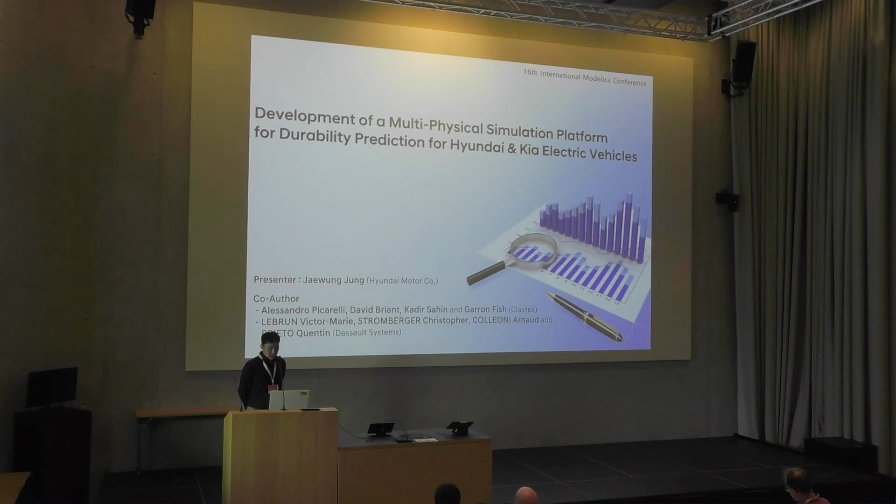Today, I'm going to talk about development of a multi-physical simulation platform for durability prediction for Hyundai and Kia electric vehicles. This presentation is a one-year research project with enthusiastic support from Claytex and Dassault Systèmes. Let me begin with the presentation.

So this is the project background. Not only HKMC, but also most international car OEMs conduct RLDA, which is an abbreviation of Road Load Data Acquisition, for durability development. The RLDA is the activity to measure multi-physical signals within instrumented vehicles on predefined proving ground and field conditions.

However, in early development stages, when there are no physical prototypes, we are not able to conduct RLDA to validate the durability of new mobilities and technologies. Therefore, we want to virtually build all necessary subsystems like this, and then integrate them into vehicle level to acquire the same signals as RLDA on proving ground and field conditions.

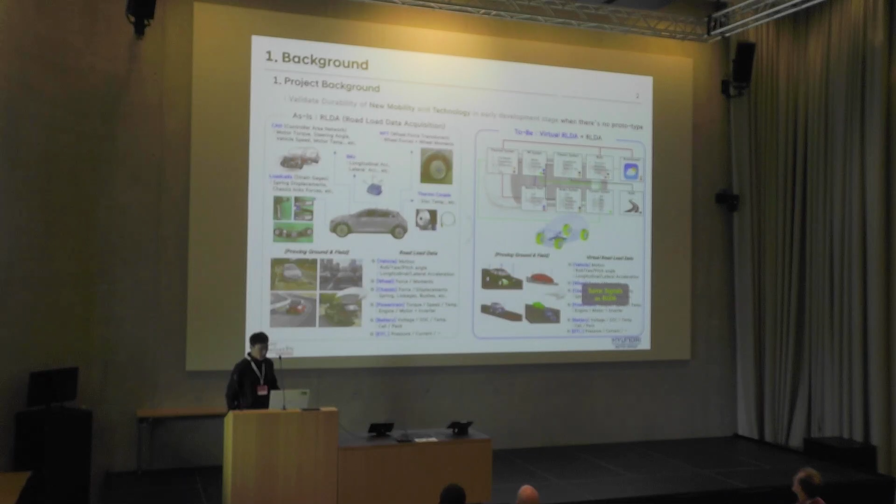As for the xEV point of view, we have defined the possible durability failures not only in conventional mechanical domains, but also in thermal and electrical domains. As you can see on the right side, we also have defined the list of simulation signals that will be used for further durability analysis.

In this project, the in-wheel motor system is selected as a project target as the most challenging new technology. Here are the three major features why the in-wheel motor system is so challenging. First of all, the in-wheel motor system is 40.9 kilograms heavier than the standard wheel and tire system, and structurally it gets the direct road impact.

Also, the in-wheel motor system is affected by both brake heat and motor heat in encapsulated conditions, which can cause motor derating or demagnetization. Also, the in-wheel motor system requires very complex torque vectoring control logics for very different driving conditions.

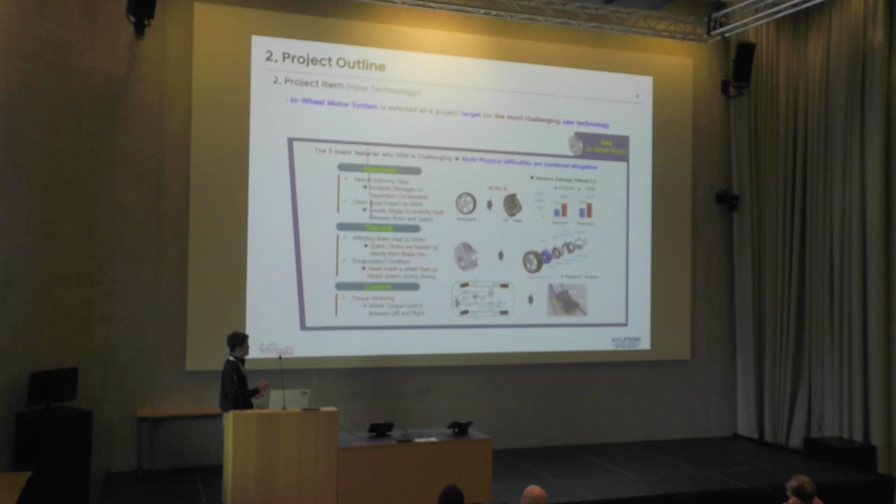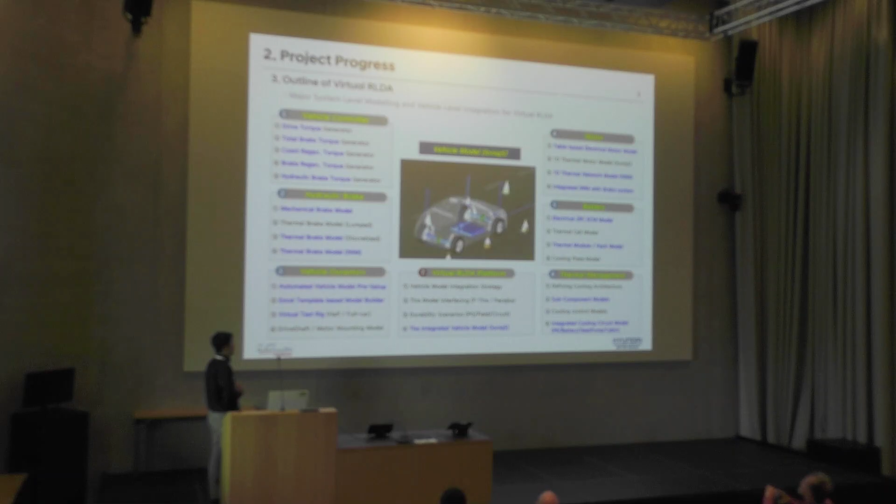So this is the outline of Virtual RLDA. In this project, we have modeled 6 major systems: vehicle controller, hydraulic brake, vehicle dynamics, motor, battery, and thermal management system. Then we integrate them into a vehicle level for Virtual RLDA. From the next pages, I'm going to talk about how each of the 6 systems is modeled and validated with the measurements. The first system is the vehicle controller.

The main role of the vehicle controller is to generate driving torque and regenerative braking torque, and also hydraulic brake pressures during driving. The regenerative braking torque consists of braking regenerative torque and coast regenerative torque, and it distributes the motor torque between front and rear. As you can see on the right side, the vehicle controller is built with Dymola based on the VCU and IAU control logics.

This is the validation result of motor torque and hydraulic brake pressures for 2 different scenarios. As for the front and rear motor torque, the driving torque, which is positive, and regenerative torque, which is negative, are quite well validated with the measurements. It means the vehicle controller is quite rigidly modeled, even for very severe durability scenarios. Our next system is hydraulic brake.

We have modeled both a mechanical and a thermal brake model here. First, the mechanical brake model takes the brake pressures calculated from the vehicle controller that I mentioned earlier as an input. Then it calculates brake torque, as you can see on the right side.

For the thermal brake model, we have modeled both the standard brake model and the 19-inch in-wheel motor rear brake model using a thermal network model, considering conduction, convection, and radiation during driving. On the right side, you can check the validation results of both front and rear brake models, even on very severe downhill conditions measured in a Korean field.

The next system is vehicle dynamics. HMC is using Adams Car as a standard multi-body dynamics model at the moment, and most vehicle parameters are distributed in Excel format. Therefore, we have built an Excel template-based automatic multi-body dynamics model migration environment to be able to use HMC's standard Adams Car model in the Dymola environment.

Also, for efficient simulation, we have built automatic preload setting functions according to different vehicle weight conditions for kinematic and compliance elements. This is the validation result of the Ioniq 5 suspension model with the virtual test rig. As you can see on the right side, the vehicle spring displacement, jounce bumper forces, and lower control arm A bushing longitudinal forces are quite well validated with the measurements.

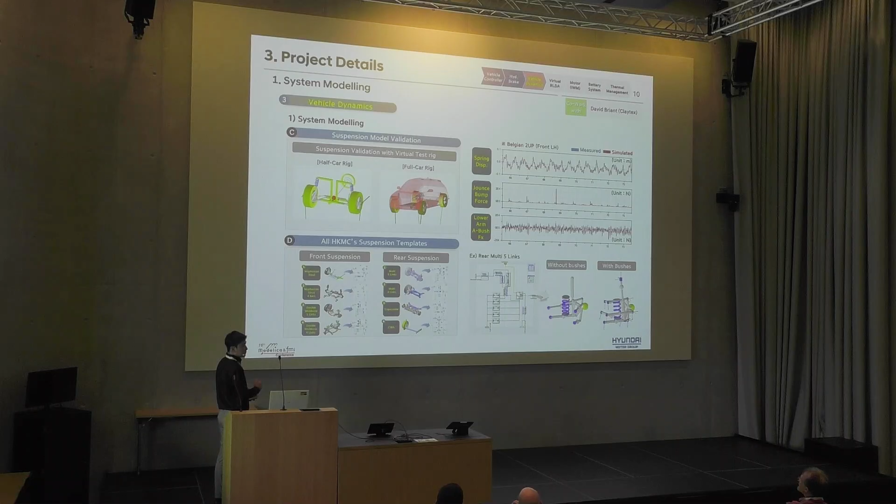By modeling all HKMC suspension template models like this, we are now able to simulate any type of vehicle in HMC in different suspension configurations, whether there are bushings or not. The next system is the motor system.

The left image is the in-wheel motor system in HMC, but due to confidentiality issues, I'm not able to show the exact schematic of it. We have modeled both an electrical and a thermal motor model here. As you can see on the bottom right side, the electrical motor model is basically a table-based model, and it calculates the heat losses on major heat sources in the motor.

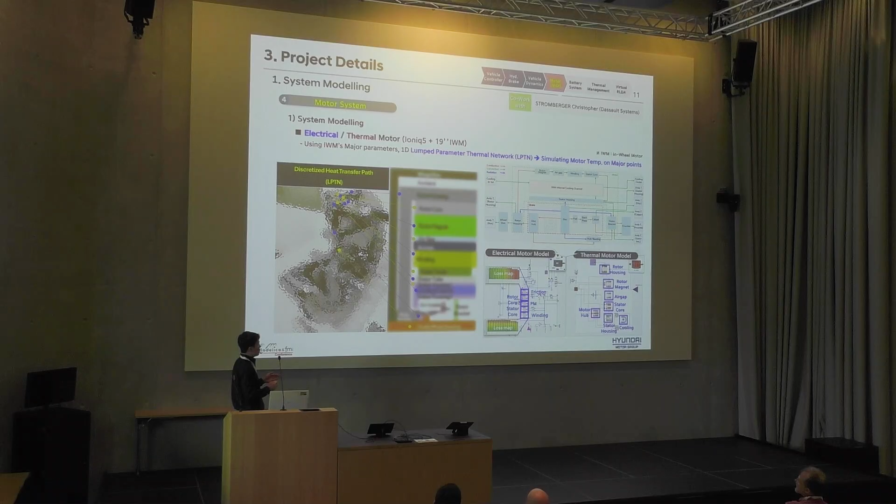The thermal motor model simulates temperatures on major heat sources in the motor using a 1D lumped parameter thermal network model. The biggest advantage of this 1D lumped parameter thermal network is to represent multi-axial heat transfers within a 1D environment.

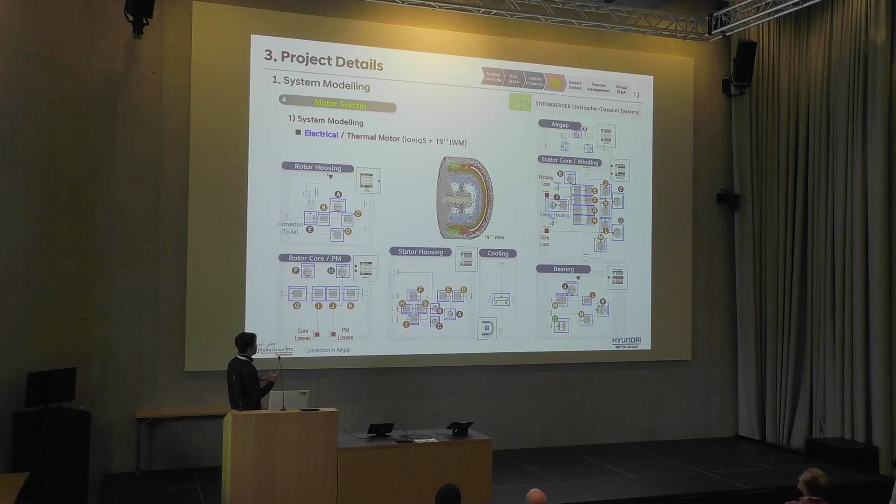So the in-wheel motor system consists of several subsystem models like this, and all these subsystem models are separately built and then interconnected within the in-wheel motor model. This is the validation results of in-wheel motor systems, and in both scenarios the brake pedals are not applied, which means only the motor's heat effect is applied, to see the exact in-wheel motor's heat effect. So in both scenarios, we can see we have validated the winding temperatures compared to the measurements.

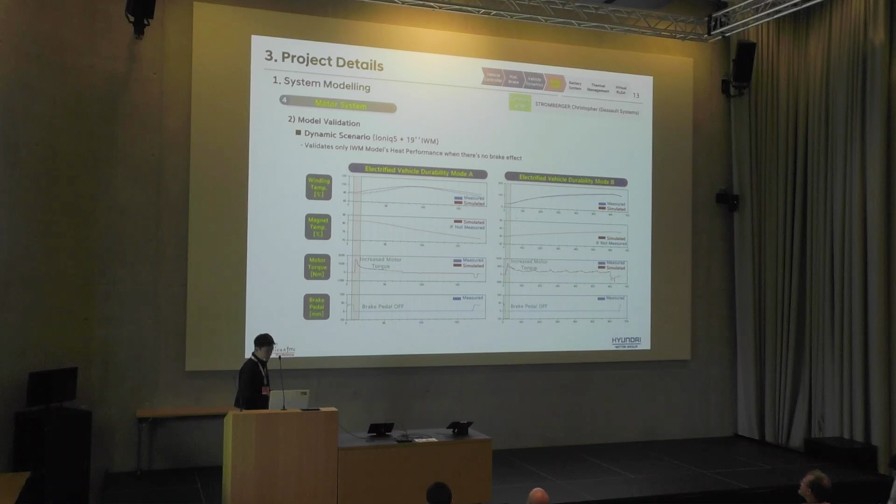So the next system is the battery system, and likewise we have modeled both the electrical and thermal battery model. The electrical battery model is modeled as a 2 RC based equivalent circuit model. For the thermal battery model, each surface of the battery cell is modeled with different thermal conductivities to represent internal heat transfers. Using the battery cell model, we can expand it into a battery pack model, also with the cold plate. On the right side, this is the validation results of the battery pack model on very dynamic vehicle scenarios measured on the Nürburgring circuit.

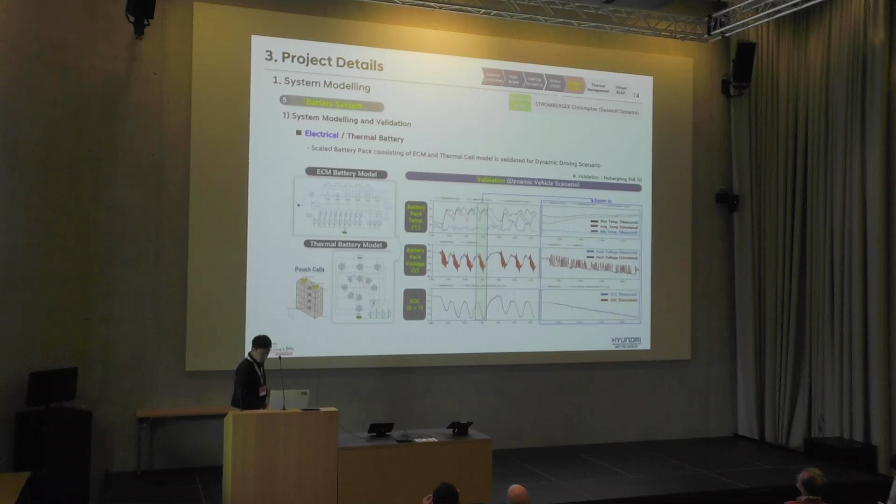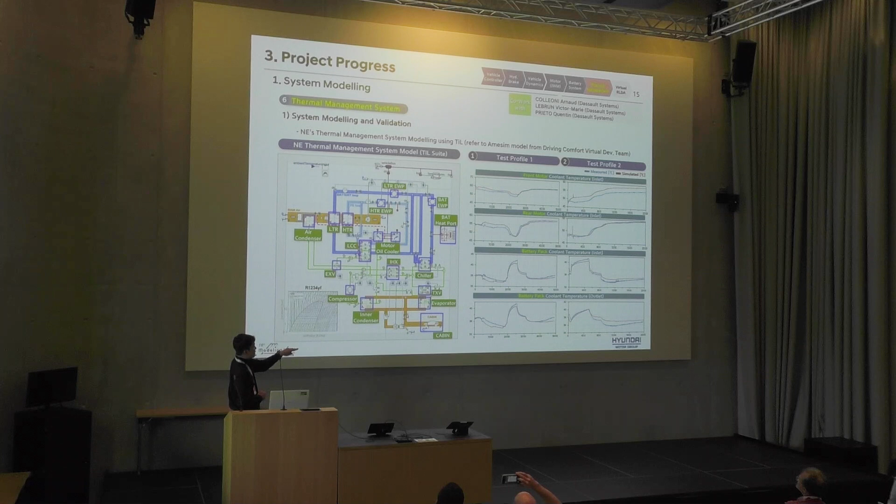The last system is the thermal management system. The thermal management system consists of three big loops: the power electric loop, which consists of a motor, inverter, and so on, the battery loop, and the AC loop, which is the air conditioner loop with the cabin model. The thermal management system model is required to control the motor and battery temperatures during vehicle driving. So we have validated the motor and battery coolant temperatures on two different scenarios during driving conditions.

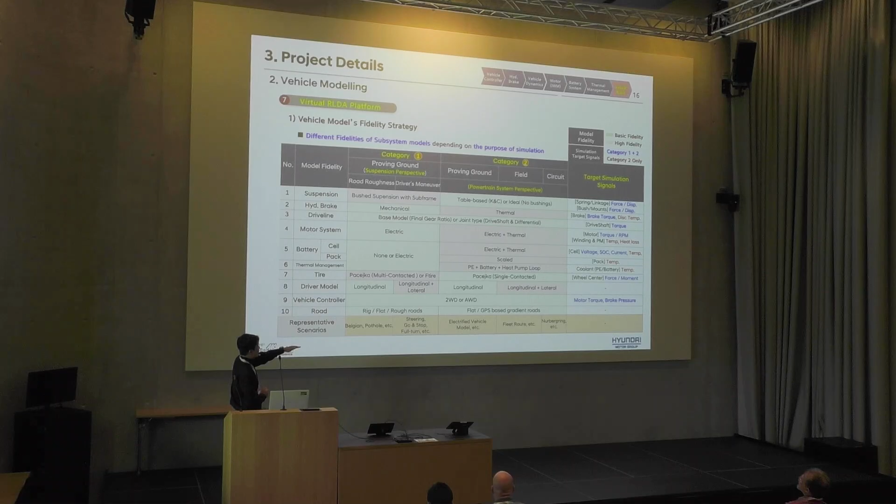From the durability point of view, vehicle level simulations can be categorized into suspension and powertrain perspectives. So this is the standardization of different fidelities of subsystem models depending on the purpose of the simulation. This is the driver and durability scenario modeling required for the vehicle level simulation. We have categorized the driver and durability scenario models depending on the type of simulation.

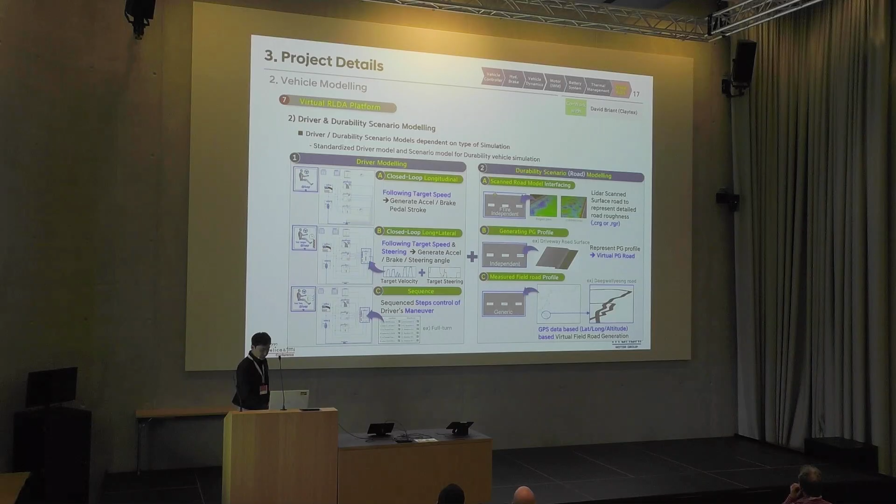So this is the layout of the integrated vehicle level model for Ioniq 5 with two rear in-wheel motor systems. In this model, three different Modelica libraries are integrated in one big vehicle model. First, for suspension, driveline, brake, driver, road, tire, and vehicle templates, we use Claytex's VeSyMA libraries, which are the blue box. For motor, inverter, and battery, we used the Dassault Systèmes EPTL and battery libraries, which are the green box. For the thermal management system, we used TLK's TIL library, which is the red box.

So from these pages, I'm going to show you the vehicle level validation results for durability scenarios. The first scenario is go and stop using the Ioniq 5's two-wheel drive model. When the vehicle rapidly goes and stops, we can see an accurate motor torque is generated, and it distributes the load transfers between front and rear. As a result, it results in the correct suspension reactions like this. So this is the go and stop validation results.

Sorry, it takes some time. Sorry.

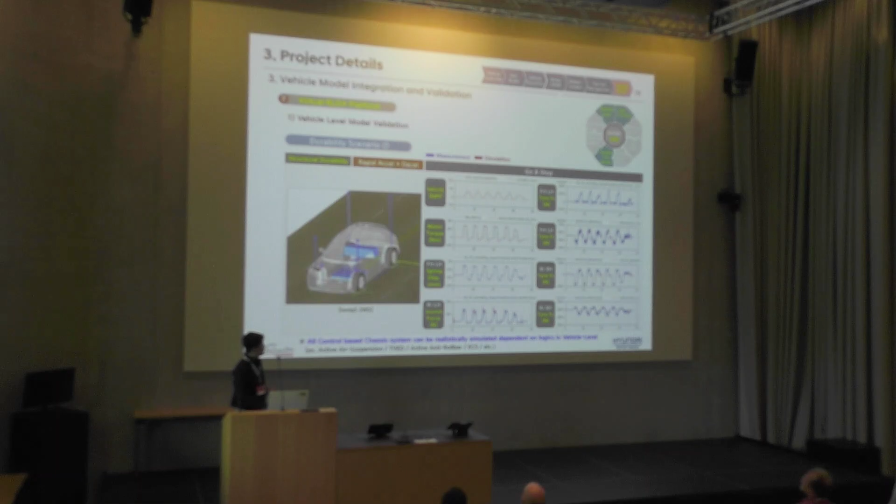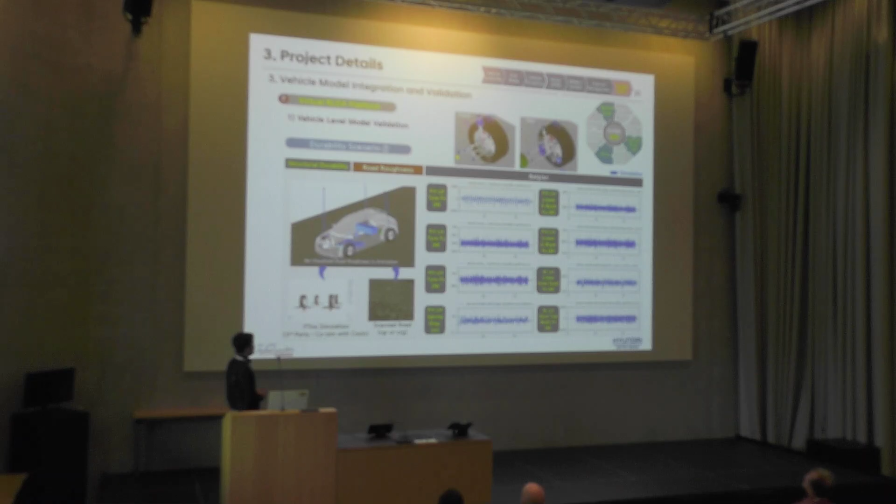Okay. The next scenario is the Belgian pave. We also used the Ioniq 5's two-wheel drive model here. In this case, we used the scanned Belgian pave surfaces in CRG format together with the FTire model, along with a very high fidelity suspension model. So as you can see, the VeSyMA vehicle can simulate very high fidelity multi-body dynamic simulation.

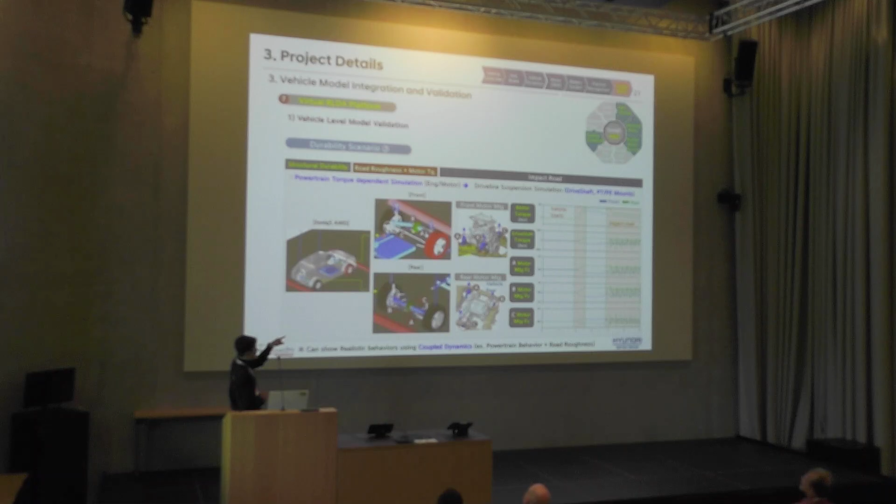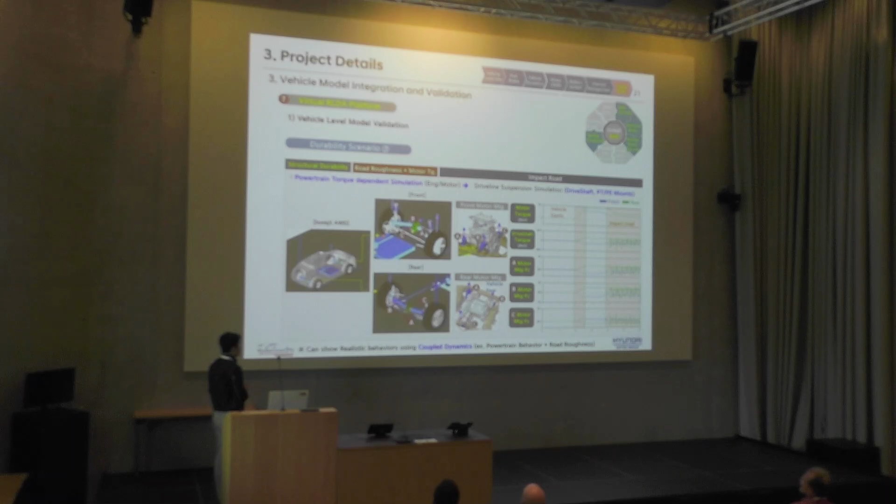The third durability scenario is the impact road. In this case, we used the Ioniq 5 all-wheel drive model, which means there are two separate motors for front and rear, with an all-wheel drive vehicle controller model. When the vehicle accelerates at wide open throttle, each motor mounting gets reactive torque due to the motor's local behavior. Also, when the vehicle hits the impact bar, which is the red bar in the animation, the motor mountings also get some damage due to the road roughness. So this model can show the realistic behaviors of motor mounting systems, considering the coupled dynamics between the powertrain's local behavior and the road roughness.

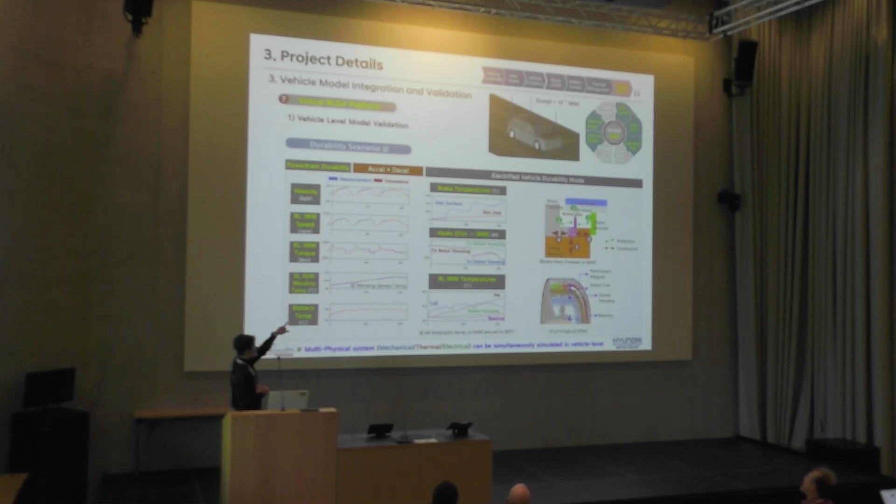So now the conclusion. From this project, we first defined the simulation systems and signals, and we've done the system level modeling and validation, such as vehicle controller, hydraulic brake, vehicle dynamics, motor system, battery system, and thermal management system altogether. Then we've done vehicle level integration, durability simulation scenarios and driver modeling. Using real measurement data, we've done the vehicle model validation. From that, we finally developed a scalable virtual RLDA platform. We are going to use this platform model for durability development of Hyundai and Kia vehicles in early development stages.